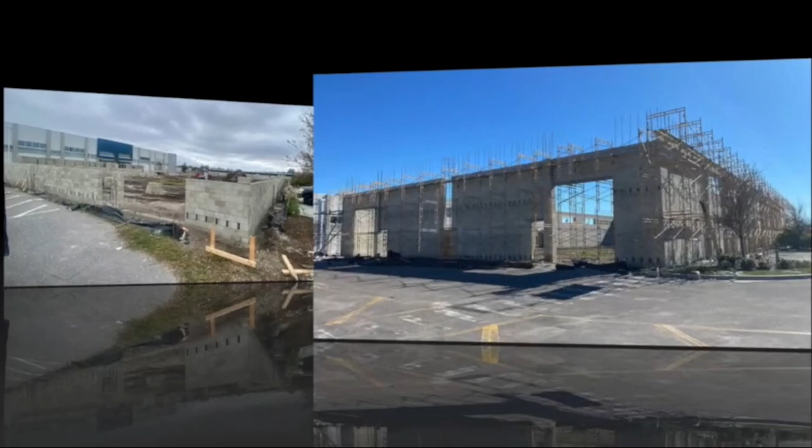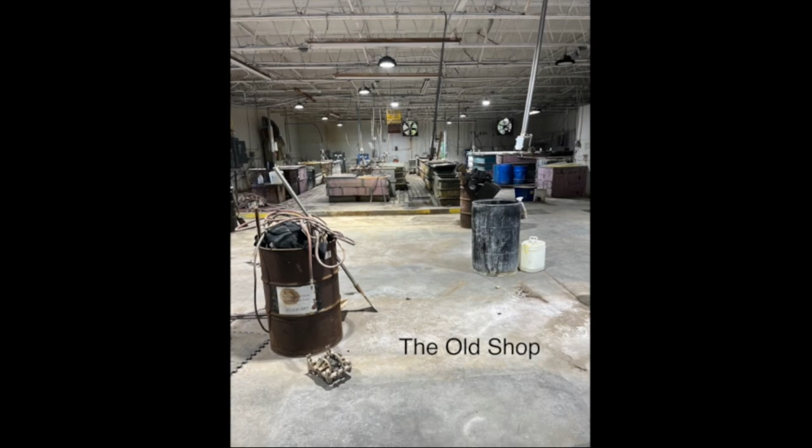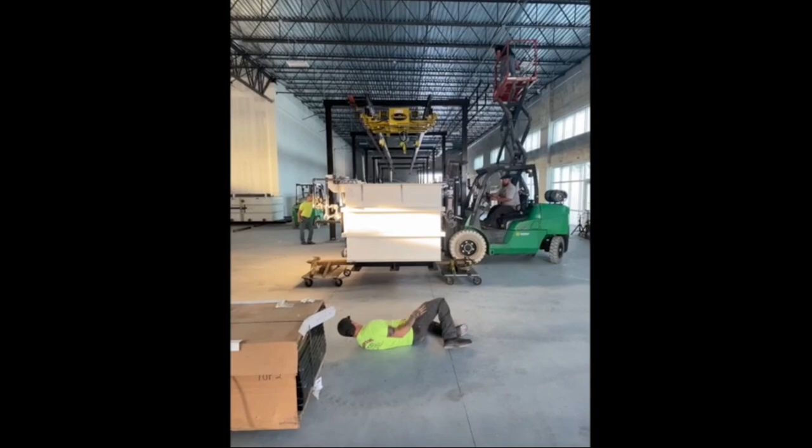That's the old shop there. A lot of activity today.

Well, there you go, 19 months of work captured in 2 minutes and 20 seconds. As you can see, it was a major transformation for our shop. Definitely a labor of love, a lot of ups and downs, but we were successfully able to complete it. We've now been in our new facility for a year and a month, so we just celebrated our first anniversary in the new facility. Why did I show you that video? Because I wanted to show you where we came from.

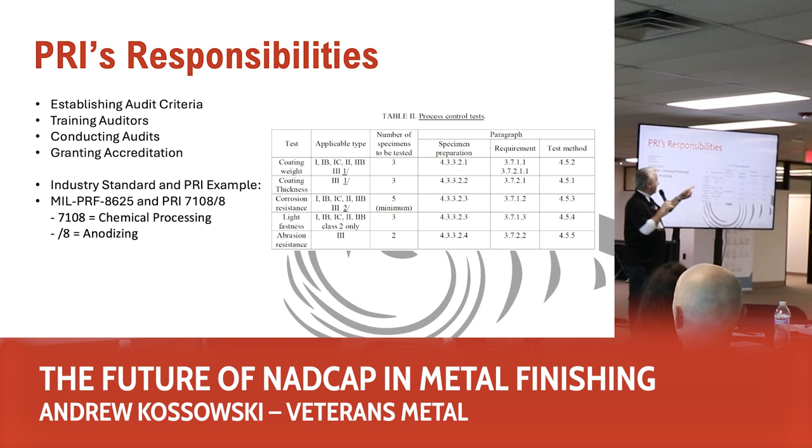If you have an auditor that comes into your plant or facility and says something that's not in the spec or it's not part of an aerospace standard, then you can challenge that. I've challenged things, and I'll give you some examples later on. So here's an example. This is right out of the mil-spec 8625, which is the mil-spec for anodizing. The corresponding sheet for NADCAP is 7108, which is chemical processing. The slash sheet is the slash 8, which is for anodizing. And this is what they're auditing on. Are you complying with this spec?

If they add to this, they're wrong, right? Because remember, they hire contractors, and some of them have their own opinions. I'll give you a good example. When we did the first audit in 2022, the auditor said, you're supposed to use DI water for your seal. And that is absolutely false. That is not what it says in the spec. The spec says you can use DI water as an example, such as, that's what the spec says. So you can use any aqueous material as long as in the end you're passing your periodic testing.

So I had that printed out. I also contacted their head of NADCAP for chemical processing, which is Nigel Cook out of England. I wanted him to confirm it. He sent me an email, so I had those things ready. So when I gave it to him, he said, oh, I'm sorry, you're right. So don't assume because the auditor tells you that this is the way it's supposed to be, it is. No, they're supposed to be there to check on your compliance to existing standards, not made up ones because the auditor did it that way in his shop. A lot of people don't realize that.

Right now, NADCAP is going through a point of inflection. A lot of shops like mine perceive it to be a bit outdated. If you look at the handbook that's provided by PRI, by NADCAP, and you look at the examples, for example, of their traveler cards or their PO checklist, you can tell it was typed on an IBM Selectric 3 typewriter. How many remember the IBM Selectric 3 typewriters? That's still there today in the handbook as an example, right? So it's kind of backwards thinking, right? They're still stuck in an old mode.

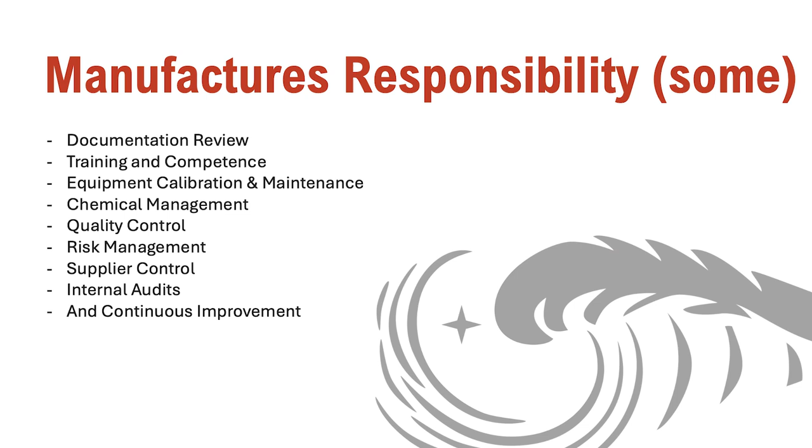And continuous improvement, showing that you are continuously improving your process. And I put the word some on purpose, because these are just some of the things we have to do in order to prove that we are in compliance of standards. And imagine how much paperwork is involved in this. And if you're a small shop, in the state of Florida, we have 24,000 manufacturers. 80% are 20 employees or less. When I bought the business, it was just 4 employees. We have 16. We're going to add another 8 over the next 6 months, so we're growing really rapidly.

But I wear many hats, all right? And one of them is to prepare for these audits, right? That was one of my hats, along with my plant manager. So it's labor intensive to be prepared for these audits, and it's very disruptive. Anyone tells me it's not disruptive, you're lying, because when you add an auditor in your premises, first of all, you're preparing for their arrival, making sure that all your T's are crossed, your I's are dotted, and then when they get on site, it's very disruptive when they're there, especially if they're there for an entire week for 5 days, like in our case.

Past audit compliance method, I'm going to give you some examples. It was all paper and pencil, nothing was connected. So that was how we were capturing our anodize tank, number 3, our temperatures on a daily basis, right? So imagine, this is being captured, right? But it's not connected to anything. It's not going anywhere. This was one example.

Another example here, so these were traveler cards at a part level that we were using, that I inherited. And my daughter, who's the office supervisor, is here. She'll tell you we had file cabinet after file cabinet after file cabinet of these cards of parts. And how many of these were duplicated? It was just crazy. We don't have them anymore. They got scanned and shredded because we're a 100% paperless shop now, no paper. But that was how we were maintaining the traveler cards at a part level.

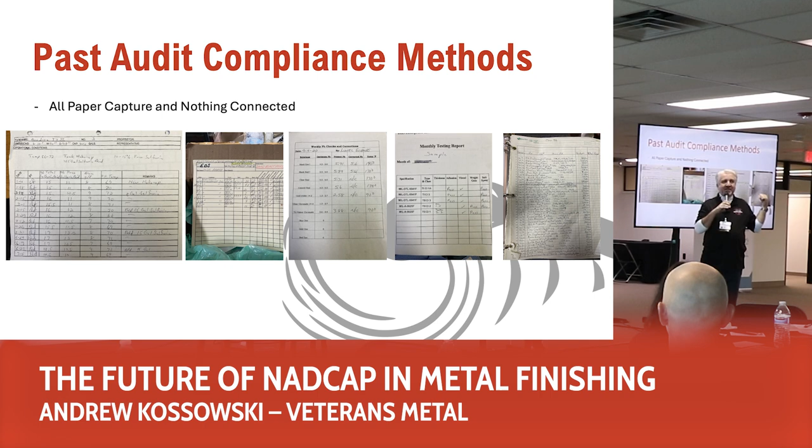And the last one here, believe it or not, my predecessor, that's how he was doing invoicing. Right, so those are the invoice numbers, the customer, the amount, and the check he got. So I want to put it in context. What we were doing was so incredibly inefficient. And it's important because even in NADCAP, you have to show control of your purchase order process, right? Do you have all the basic information? If you go to the handbook in NADCAP, it'll say, does it have a part number? Does it show the material type? Does it show the process type? Is it referring to a spec?

Is it a current spec? All these things are on a checklist, and if you're missing one thing, it's a minor finding, right? So this is just a great example here, real examples of my old shop of what it used to be like. I'm going to give you a list of future compliance methods, not necessarily particular to Steelhead. There are many things that Steelhead does cover. There are some things that are not part of Steelhead, maybe a different party or maybe PRI themselves.

One is digital documentation management. We use a combination of Steelhead, but we also pay for Google Drive services because it has version control. And then we're working on other things to focus on CUI, which is controlled unclassified information, for the future of cybersecurity. Another one is audit management software. So we do regular audits. We have some things that are audited on a monthly, quarterly, semi-annual, or annual basis. That's all done through our software. Most of that is in Steelhead today.

Mobile applications. I'm a big fan of mobile applications. Not just Steelhead, but everything in my shop is connected. So right now on my phone, I could tell you exactly from my new state-of-the-art waste treatment plant how much waste I have treated and dumped into the city sewer at this very moment. So if it's not within the flow rate parameters, upper and lower control limits, I get notified and alerted, right?

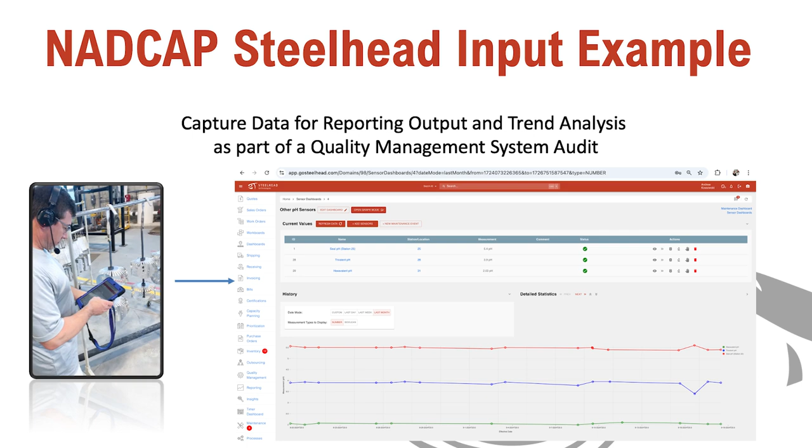And we use Steelhead, and this is just one example of the reporting, but this information ends up going to the NADCAP job audit report. So you're gonna see the job audit report here in just a moment.

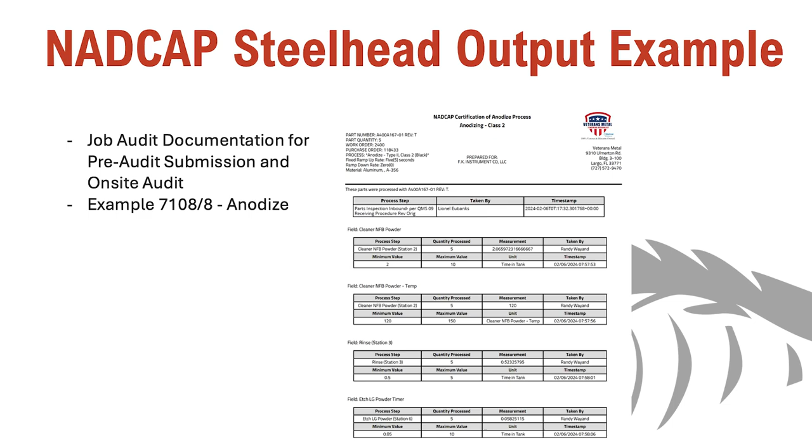So here's an example. This is the page out of Steelhead. This is a 7-page report for anodized class 2 for my customer FK Instrument. They've been around for 75 years, one of our top 3 customers in the company.

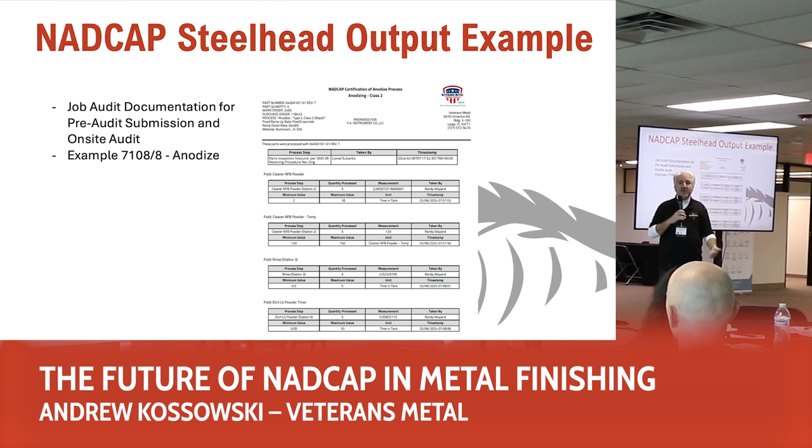And this is the first page, and it's in step order, right? Already in Steelhead - this is a template that I've already created, and it populates from all the data entry, whether it came from the work order, the sales order, or the daily maintenance. But it all aggregates and gets into our report. And this example is that 7108/8, and this is straight out of Steelhead. Now I'm happy to send you a copy of the entire report if you guys want it.

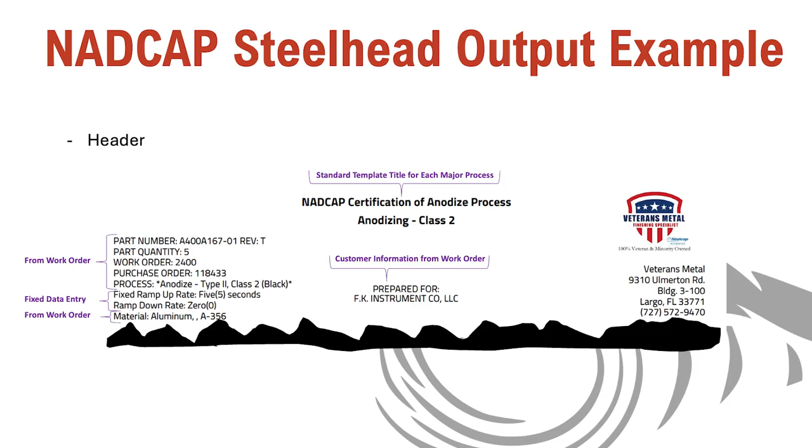So let's break it down a little bit. Let's look at the header, for example. So again, the source information - standard template for all my major processes. So it's already been pre-populated. This comes from the work order. This comes from the work order.

This comes from the data entry that Randy does in the morning, and this also comes from the work order.

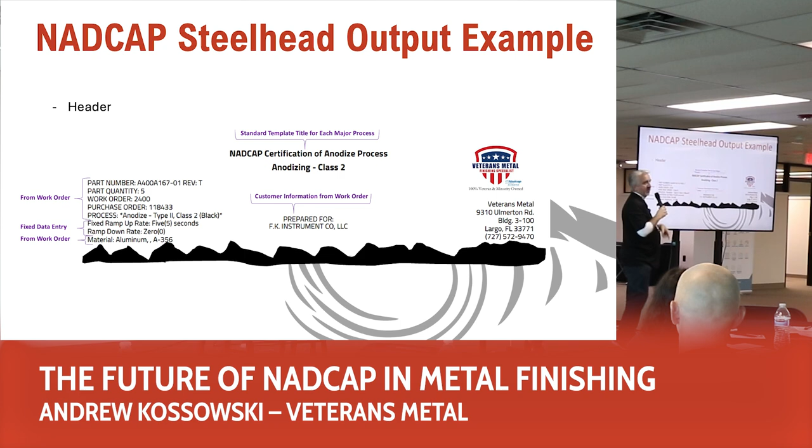It's an example of efficiency. I am 8 times more efficient when we moved into our new shop, and now we're even more efficient because we've learned since then. But an 8x factor from old to new. I used to be able to process no more than 50,000 parts a month in the old shop. My predecessor could only do 25, we did 50, so we maxed it out. The new shop has a capacity of doing 1 million parts a month, so we have a lot of growth, a lot of runway ahead of us.

Right now we're running about 180,000 parts a month, and we're growing very rapidly.

First step, of course, is QMS inbound inspection. QMS 09, we have all our quality management system documents, already preloaded in Steelhead. And when they bring up the lines, we use iPads and scanners. Everybody has an iPad and their own personal login.

That person who's doing the inbound inspection has a criteria to follow. They'll follow that step and check it off, and then it marks it. What does it do? It also gives me who did it, because Lionel used his login, and the timestamp.

By the way, this is an old example. It's no longer GMT stuff here, it looks like this now. But it came from routine work that we're doing every day using our equipment.

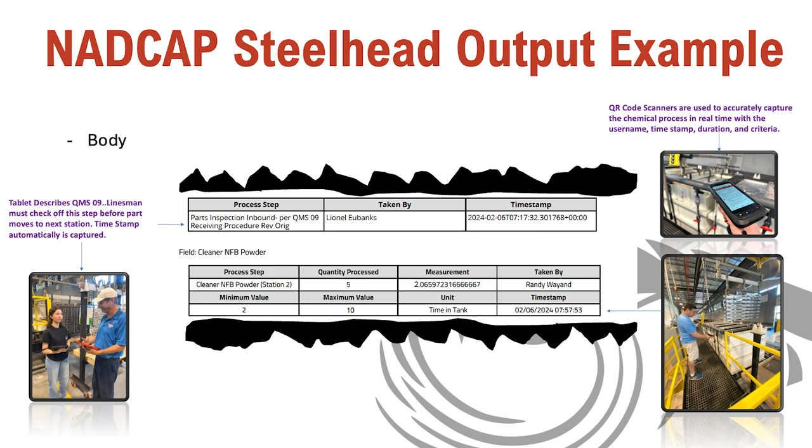So in this case, the first tank is an industrial cleaner. How many parts did I process? 5. What was the measurement that was taken by Randy? It was in the industrial cleaner for a little over 2 minutes in this particular case. Pass criteria is more than 2, less than 10. The unit of measurement is time in the tank, and when did it happen? Okay, that's what the auditor is looking for.

The point is, this is real. It's not pencil whipped, and you can see them here. That's the scanner there. There's Randy again. Randy, you're very popular today. So you can see the very first tank, the soap tank, and him scanning it.

We're running about simultaneously anywhere between 6 to 8 jobs at the same time. Some of these racks contain 3 or 4 work orders at the same time. So we can have many jobs running simultaneously, but we're using the scanner so we don't have to worry about that, and the scanner also tells us that we're doing the right thing.

So this scanner is what I show my auditor. He says, how do you make sure you don't put it in the wrong tank? Well, Steelhead's telling me it's the wrong tank. Because when they're scanning it, it'll say no, it's the wrong tank.

There's a little eye candy there. It'll tell you that you have to go to this tank, this is the next tank you have to go to. There's a countdown, green, yellow, red, telling you how long it should be in the tank for so you don't exceed your values.

It's all about repeatability. I don't want my people to be computers, I want them to use tools. All I want them to do is use their head when it comes to development of the recipes of those parts when we get them for the first time.

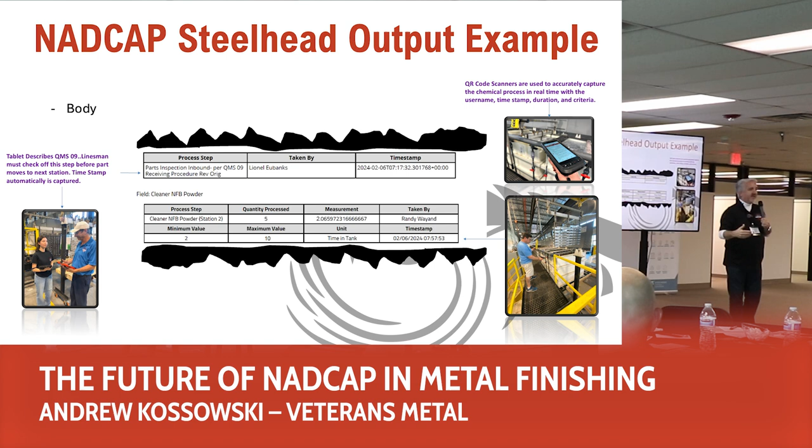And then we actually have a strategy meeting, a contract review meeting, which is also part of Steelhead, to review what that recipe is going to be. Once it's done, it's done. The linesman just has to follow it.

Water break is another big issue. If you're in the anodizing world or chem film world, that's a criteria, that's a mil-spec requirement. And a lot of people get a minor finding because they're not performing water break tests.

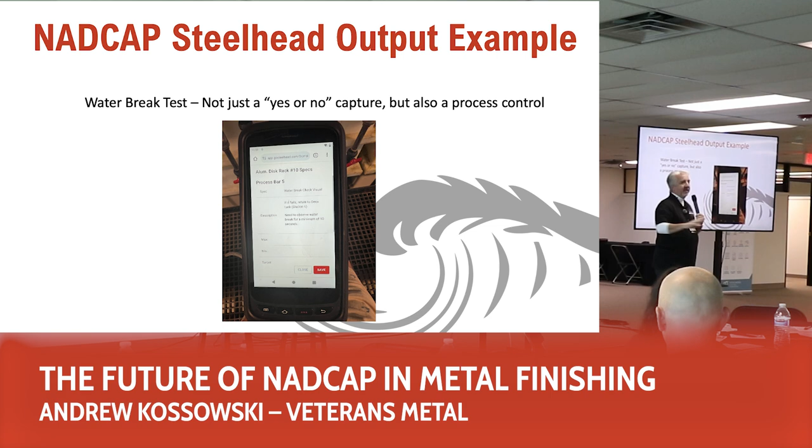What's cool about it in Steelhead, if it doesn't pass the visual water break, Steelhead will force you to go back again and start again at the previous tank until you say you've passed it. We have three inspections in our shop: inbound, post-process, and outbound.

If you say you passed it when you didn't, you're going to have a problem with the plant manager disciplinary-wise because you've just pencil whipped it digitally. That's the only risk. But what's great is we have so many steps in our digital process that we'll capture people trying to circumvent the system. Water break is an important part of getting NADCAP accreditation, showing that you've performed it, because if you don't get a good water break, the process is probably going to fail at the end.

I love this feature because people were not adhering to water break. Now they have to pause, they have to check this box, they have to make a conscious decision to say yes. And if it's really no, then I don't want them on my team. So this is a great tool and it's helped us a lot, especially on reworks, by following the water break test as an example.

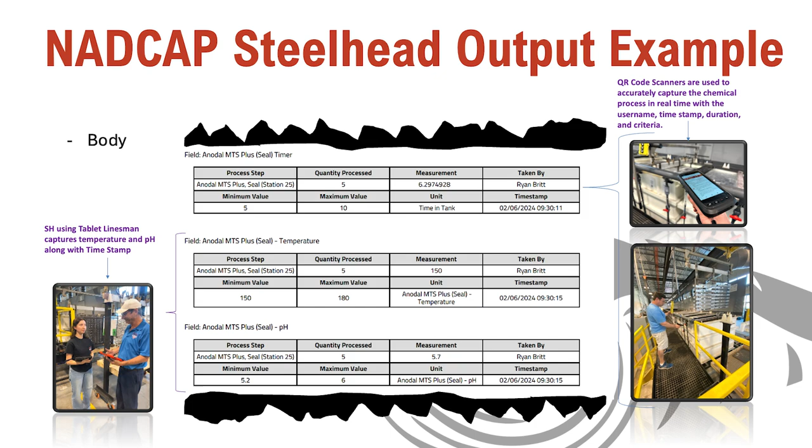Here's another example: this is one tank, the seal tank. We're required to get the time, the temperature, and the pH. It's a requirement to demonstrate that. Steelhead already captures that information.

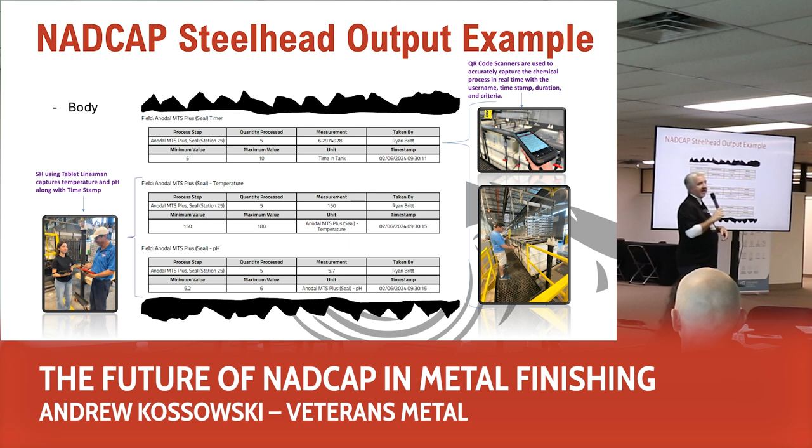But again, it's all about efficiency. We entered it one time — it was entered at 6:30 in the morning, temperature and pH. This part was run a little later in the day at 9:30 a.m., and we were able to capture it in real time. No pencil whipping — just to show you where the source data came from.

We have something we call a racking recipe, because you have to rack parts in a certain way to maximize your potential success. If you don't rack it the right way, you could get bleed out, air pockets, all kinds of problems. We do that because if Tommy does it one day and Jeff does another day, they open up Steelhead and see how it was racked, and they'll rack it the same way every single time. At my old shop, I couldn't do that.

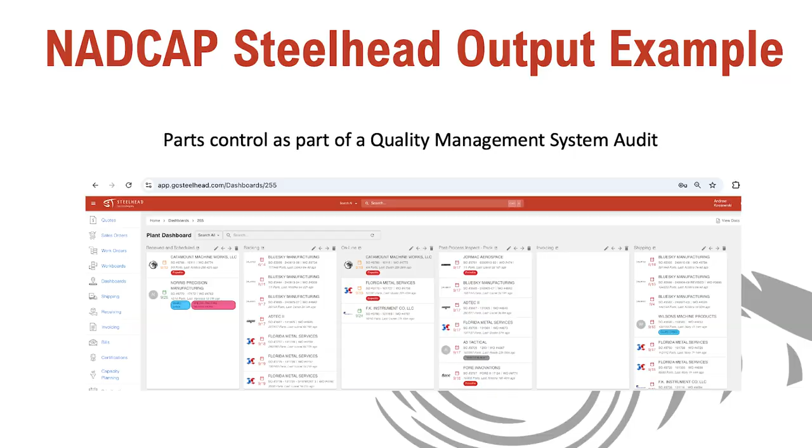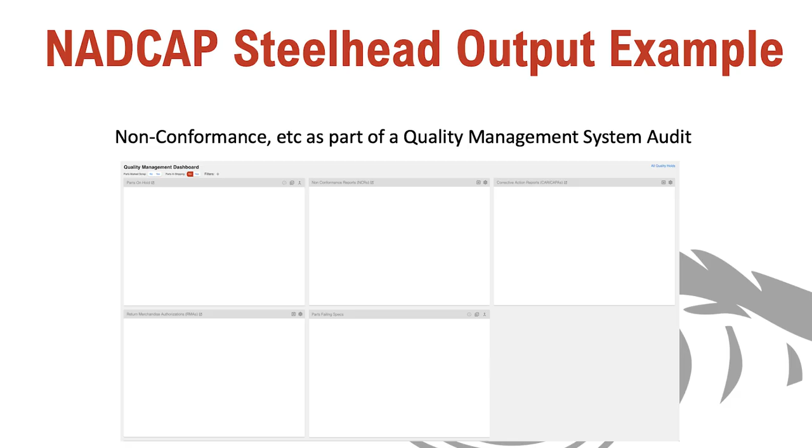So the auditor sees this and says, you guys really have control of your parts. He just flies through that section on parts control. Little other eye candies we've added ourselves: expedite, quality critical, special racking instructions. Again, the auditor sees that and can tell we are very much in control of our processes. There's another section for non-conformance — it's not populated because we just archived it all.

This is a quality management dashboard in Steelhead. I used this when we were getting audited. It's got parts on hold, non-conformance reports, corrective action reports, return merchandise authorizations, and parts failing specs.

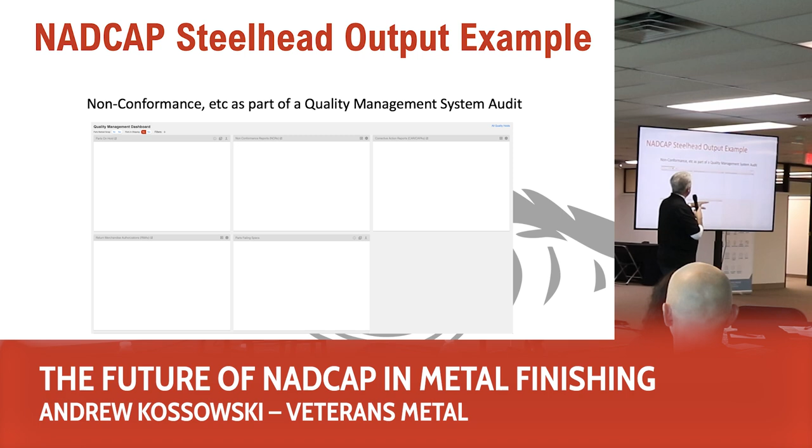So this is an important part, especially if you're trying to get a quality management approval, whether it's AS9100 or AC7004 in NADCAP. This is all in Steelhead, and we're able to see the whole paper trail from the moment it failed until the moment it was fixed, right?

This demonstrates that we do have not only a quality control process in place, but we have process improvement, because obviously corrective action includes what are you going to do so it doesn't happen again, right? And that paper trail is here, right? It's blank now because we didn't have any issues when I printed this last Friday.

I want to now transfer to a little bit of Q&A. My purpose here was to give you some real examples of what we're doing. I'm looking forward to our next audit to take it to the next level. My goal is basically to reduce that audit time, the disruptive time in my shop. So when the auditor's there, he's not there for so many days. He should be able to easily knock it out with a digital system in a much shorter period of time than he does today.

So I'm hoping to advance that ball when I go to Pittsburgh at the new user conference here in October. And I think the possibilities are there. They're very receptive to everything I presented. I've had my head-butting moments with the PRI, but we've gotten past those things, and I think we're both on the same page right now. Does anybody have any questions they would like to ask?

I just wanted to ask, it's really impressive how much of your process you have loaded into Steelhead. What was the timeline on getting all of that information into the system? First of all, let's just take it in two parts. The Steelhead implementation for us was a phased approach. We did not do a big bang.